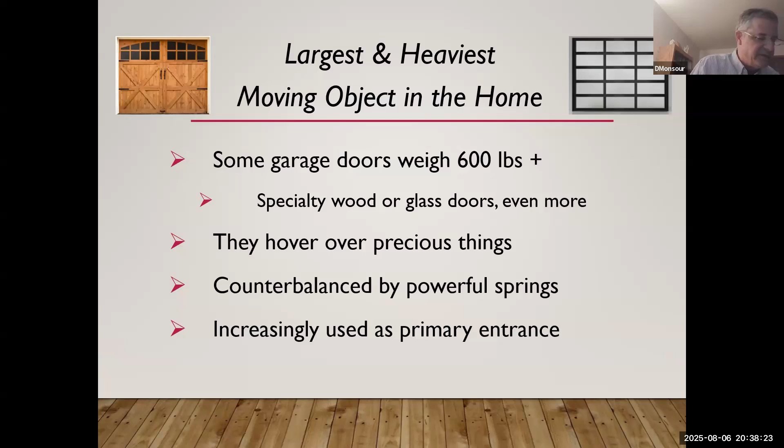So I like to tell people, imagine your refrigerator being pulled up over your head and now you're going to walk underneath it. You'd keep a pretty close eye on it. Well, that's the kind of weight we're talking about with garage doors. So DASMA does appreciate ASHI's help in getting people to take their garage doors a little less for granted and to keep them properly adjusted and maintained.

Again, these are very reliable, very safe products, but prior to 1993, the story was a little bit different. There were injuries, not infrequently, even fatalities. Clearly, improvements were needed. That picture was very clear, I think, by the late 80s, and the industry got together and made big changes in 1993 that we'll be talking about.

While garage doors are not the most expensive item you will inspect, they are one of the best investments, I think, with respect to resale. Remodeling Magazine publishes cost versus value reports every year. You're looking at the top 5 from the 2024 report. Garage doors were number 1 in percent cost recouped in resale. For 5 of the last 7 years they've been number 1, and number 2 the other 2 years. All that information is kept at JLC Online, public information.

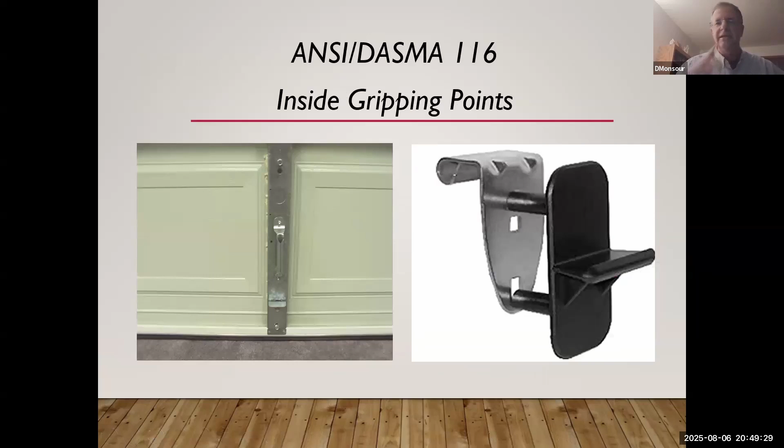Option 2 is 2 handles or gripping points inside and outside the door on the bottom and second or third section, and that's what they might look like on the inside, and that's what they might look like on the outside. Obviously, the one on the right is more of an older design. You don't see that too often these days in new construction. The one on the left is very common. In fact, I walked around 2 new developments not far from my house, and every single door on them looked exactly like that, with those handles and those fake hinges.

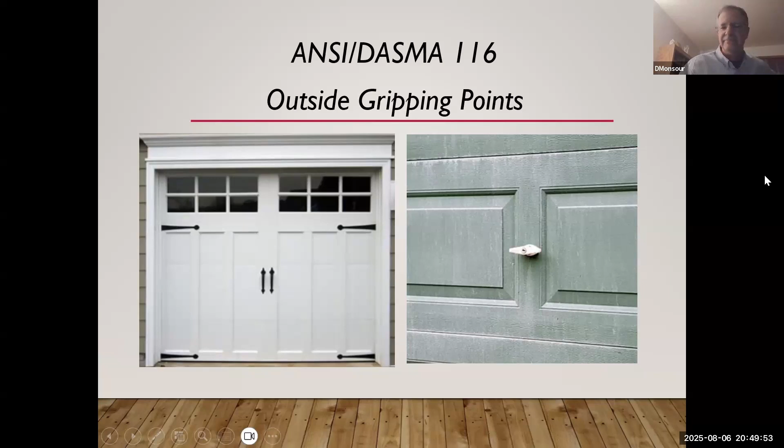Okay, so just to summarize what we've done so far, we heard of a federal law, UL 325, and 2 voluntary standards. Now, just to get in a bit to the state regulations, this is in no way comprehensive, just dipping our toe into the state regulations. States such as California, Indiana, Minnesota, and New York have regulation on repairing operators non-compliant with UL 325, and there's cities and counties and maybe other states as well.

And states such as Alabama, Arkansas, California, Connecticut, Florida, Minnesota, Montana, New Jersey, South Carolina, and Texas regulate garage doors for wind load. Plus, cities and counties do the same. One of the big ones is Denver. Many of those jurisdictions are increasingly requiring a label on the door.

The 2021 International Residential Code requires a wind load label, yes, on every single garage door, believe it or not. And that is true. Whether that happens or not is another question. How it gets enforced is a big question, but that is what the code states, and that is law in any state that has adopted the 2021 International Residential Code. Other home inspector requirements may apply for both door and operator.

Service or repair, once again, a state regulation in California, and this is in DASMA Tech Data Sheet 351. They require that 2x4 test laid flat. We'll get into that in more detail later, but that's explicitly called out in California law. Okay, so now I'm going to begin a long series of slides on Tech Data Sheet 167.

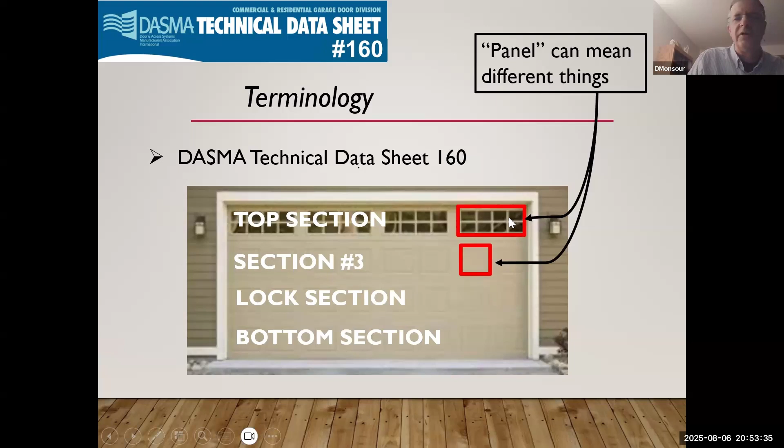Just a word on terminology. You can find industry jargon in DASMA Technical Data Sheet 160. One common misnomer is panel versus section. We call those 2-foot tall by 16-foot wide things sections. A lot of people call them panels, and sometimes we slip up and call them panels too, but most often we call panels those individual little raised panels that you see everywhere, or the group of windows.

So Technical Data Sheet 167 looks like this. Don't try to read all that. We're going to go over it in detail. I just want to show you what it looks like.

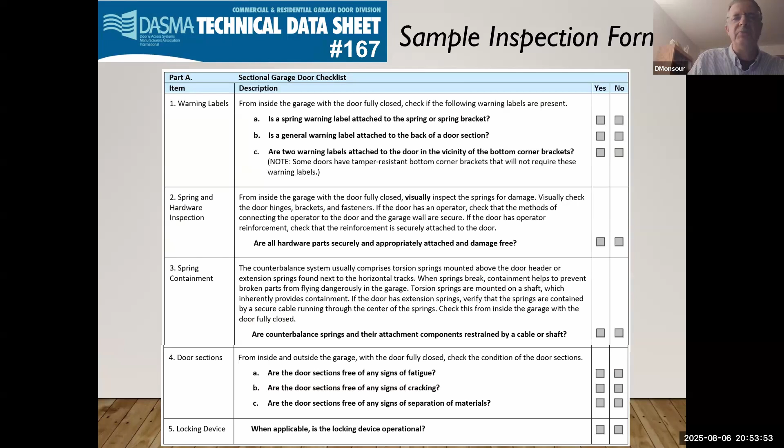Categories on the left, a lot of detail in the middle, and a yes/no checklist on the right. 1 page, 2 page, 3 page, 4 page, 3.5 pages. Tools needed: tape measure, flashlight, 2x4, remote control optional, ladder or a step stool may be needed.

The tech data sheet, the checklist, is split into 2 parts. Part A is the door, which works for a manually operated door. Part B is the electric operator. If the door is manually operated, Part A only is what you do. If it's electrically operated, you do both. It is in a simple yes/no format, and if you answer no to any of the questions or encounter a problematic situation with the door, stop the inspection, urge the homeowner to contact a trained door systems technician for inspection and repair. Hollis referred to that earlier.

Part A, the door. Start inside the garage with the door fully closed, and look first at the warning labels. There should be 4: spring label, general label, labels near the bottom corner brackets, or if you don't have labels at the bottom corner brackets, you should have tamper-resistant brackets in there.

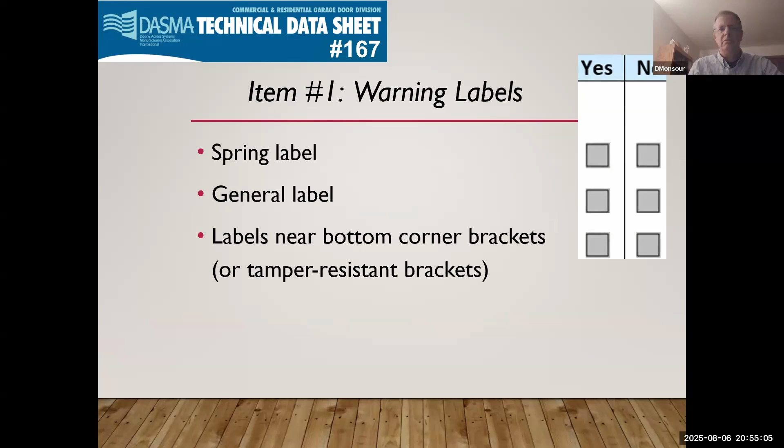Okay, item 2, springs and hardware. Are all hardware parts securely and appropriately attached and damage-free? Yes, no. That is a very big question with a very simple answer. There are, I don't know, 50, 60, 70 hardware parts, and each one of them has 4 fasteners. So you could spend all day doing that, but really you should be able to tell at a glance. And especially if it's new construction, there's no problem. But obviously, you don't do only new construction.

So take a scan. Nobody's asking you to go up with a wrench and try things or to get your head a couple inches from each item, but just stand back and look and see if you see anything loose or broken.

Springs, spring fasteners, cables are a big one. Roller brackets and hinges, operator attachment. Operator attachment is a big one. It shouldn't be a problem, but it oftentimes is because the door's not properly balanced and the operator's doing all the work and yanking things loose.

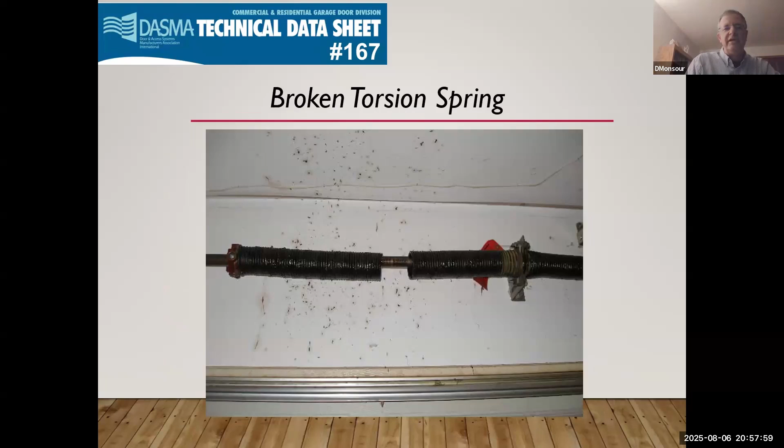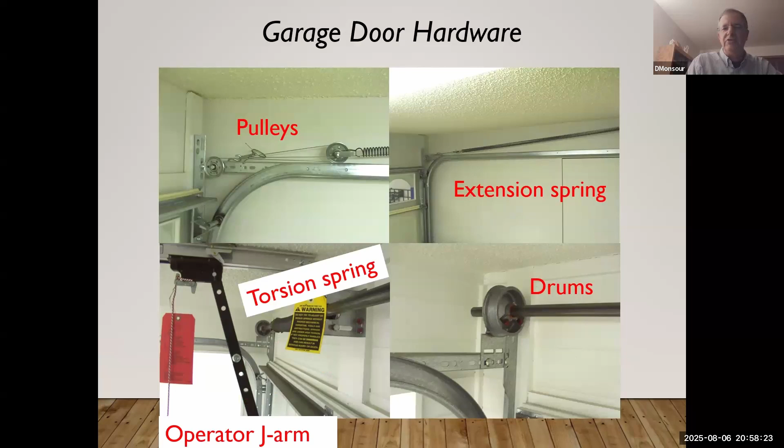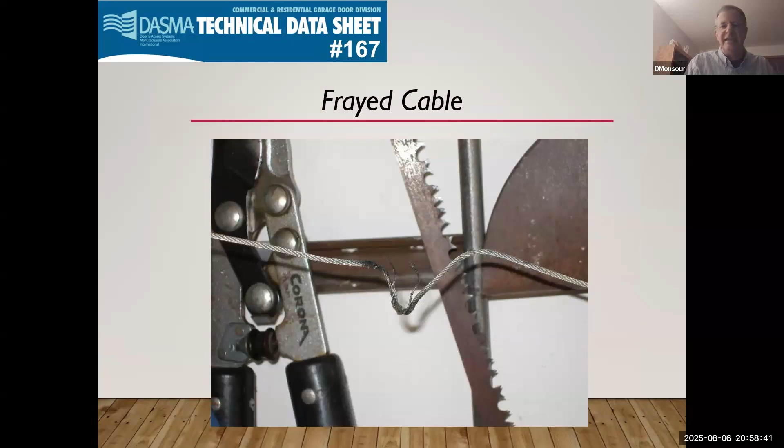Item number 3, spring containment. I show a broken spring here, but just for the sake of showing you the containment, torsion springs have inherent spring containment. That shaft is their containment. When they break, they don't go anywhere.

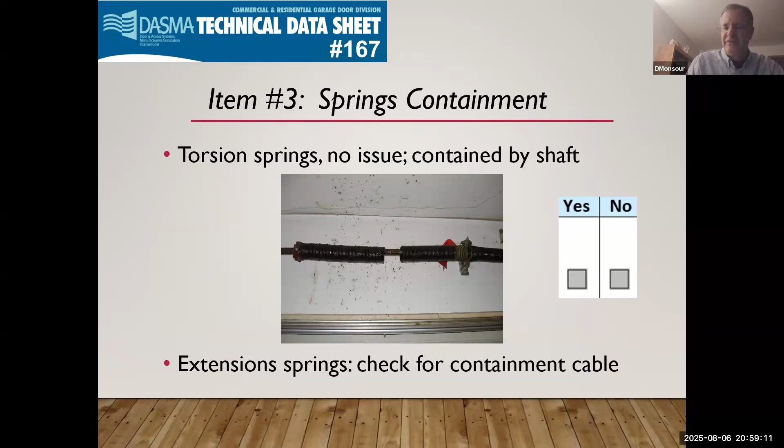Extension springs, on the other hand, may or may not have containment, and they absolutely should. Here's one that's kind of wigged out, and it does have containment. It has a cable going through it. It's not broken, but if that spring did break and that cable wasn't there, it can go flying, and it can be very dangerous when that happens. So yeah, that's an easy one to check and an important one to check on extension springs.

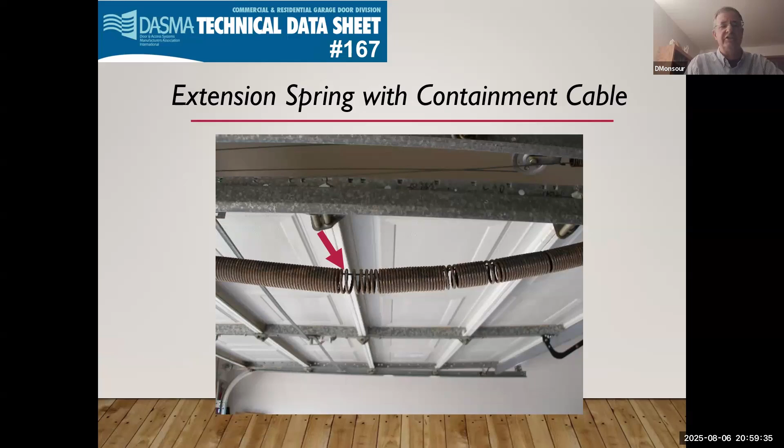So Dave, do you have any comments about the location of the torsion spring? Does that have to be centered on the door opening? No, no, that doesn't matter at all. It could be anywhere. Okay. Good, thanks.

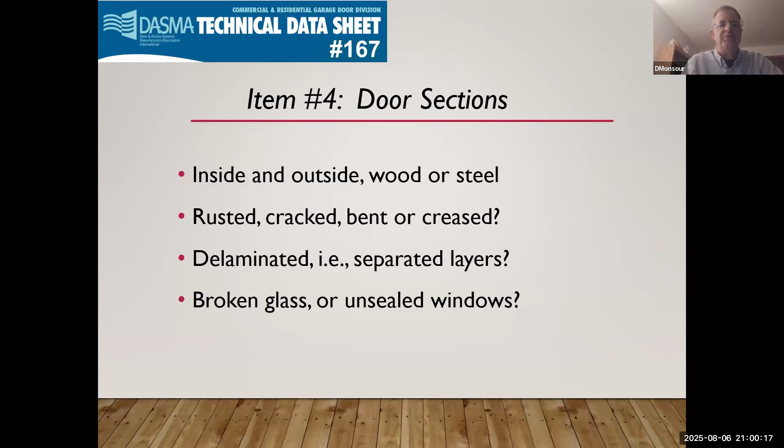Number 4, door sections. So now for the first time, you're inside and outside the garage with the door fully closed. Look at the sections, just see, is there any sign of fatigue, cracking, separation, delamination? Wood or steel doors, rusted, cracked, bent, creased, delaminated, separated layers, broken glass, unsealed windows. Very obvious stuff like that. I mean, you can see stuff like that all the time. Really should not be tolerated.

Number 5, locking device. Just check it real quick, see if it works.

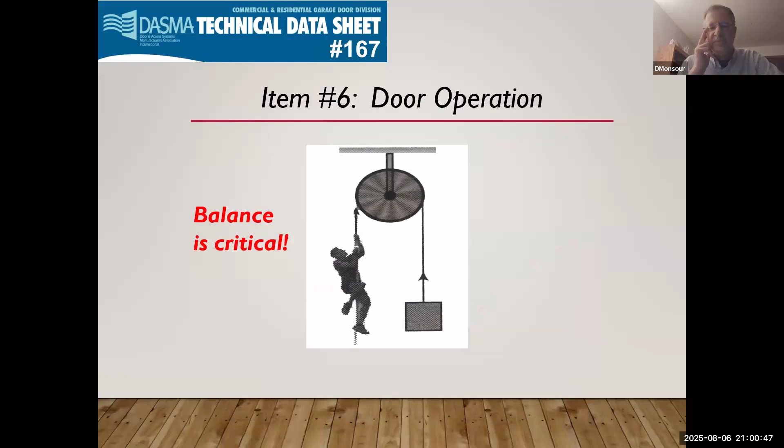Item 6, door operation. Balance is critical for garage doors. You can think of the springs and the door weight as being evenly balanced. That's the intention anyway. They should be evenly balanced, just like two weights on different sides of a pulley. If they are evenly balanced, the motor operator has a very light and easy job, and that is the way it should be.

You know, people talk about 1/3 horse, half a horse, 3/4 horse. The operator really should be doing very little work if things are properly balanced. Of course, they're not always properly balanced, so you get a lot of strain on the motor operator. Broken, obviously, usually you can't operate anything when it's broken, but quite often, especially on commercial doors, but it does happen on residential doors, the springs are not adequate, and the operator's killing itself trying to drag the door up and down.

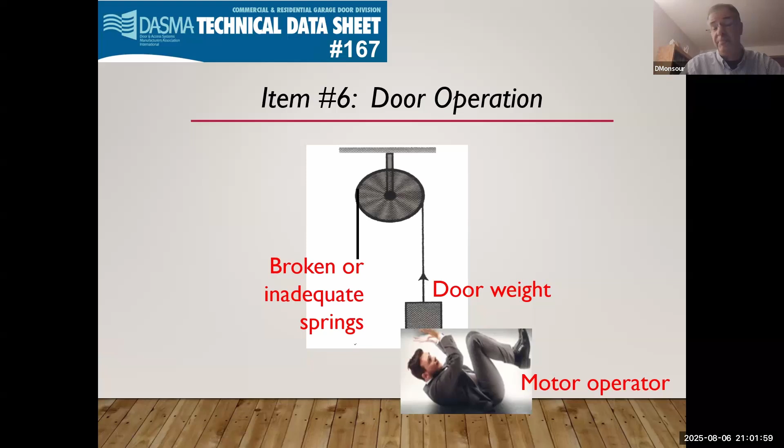The other thing I wanted to point out here is that regardless of the balance condition, every ounce of weight on that door is on that cable. So you have a cable attached to the left bottom corner and the drums at the top, and a cable attached to the right bottom corner and the drums at the top. It doesn't matter if the springs are perfectly balanced. That cable has every ounce of that weight, even so. So that cable is a very important part.

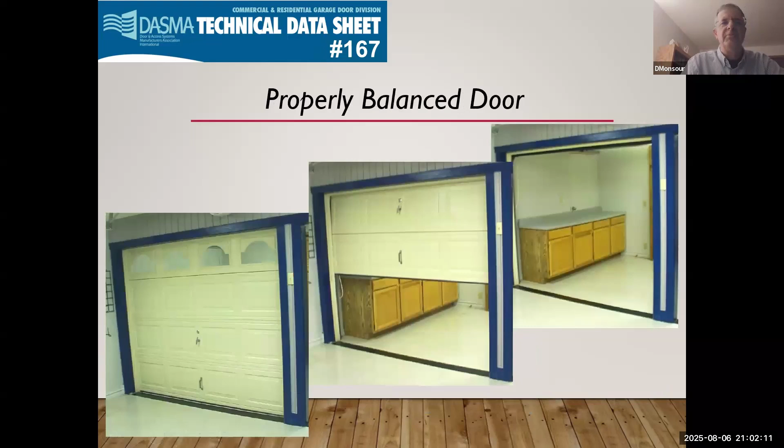Properly balanced door stops nicely at the floor, in the middle, and at the top. Some designs, however, cannot be balanced perfectly. This one has really tall sections, and probably that top section's a lot lighter than the solid wood underneath it, which is going to make the balance a little wonky. More often, because wood doors aren't the most common, you'll have heavy glazed top sections with insulated glass and light solid sections that also create wonky balance. But you'll have to use your judgment there. It's not going to be perfect, but it shouldn't be too bad either.

Next item, well, no, this is the same item, manual door operation. So we've listed 6 items to check there, but hopefully, once you get used to doing it, you should be able to blitz through these quickly. Just look and see if there's handles or gripping points, and does the door move freely. Obviously, before you do this, you have to pull that red disconnect. If the door is motor operated, which most often it is, you'll have to pull that red disconnect and try all this. So do the rollers stay in the track during operation? Does the door stay in the fully open position?

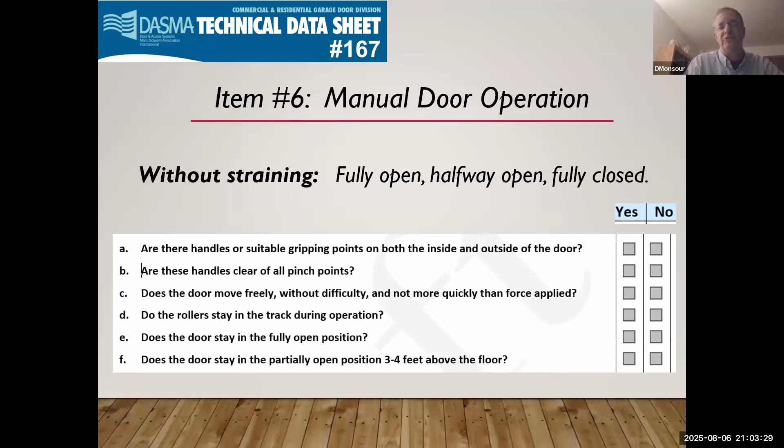And does the door stay in the partially open position 3 or 4 feet above the floor? If the door is electrically operated, this step is deferred until item 11.

Now we're on to part B, the electric operator. Start inside the garage with the door fully closed. Your first item of business is the wall label. A warning label goes by the wall control.

Wait a minute, Dave, let me back up. Did you just say that you're going to defer the manual operation till after you do the automated operation? No, it's coming up pretty quick. It's not all the way through the electric operation, just a few more steps.

Okay, so next step is the manual release handle. Make sure it's there, should be red, and should be no more than 6 feet above the floor.

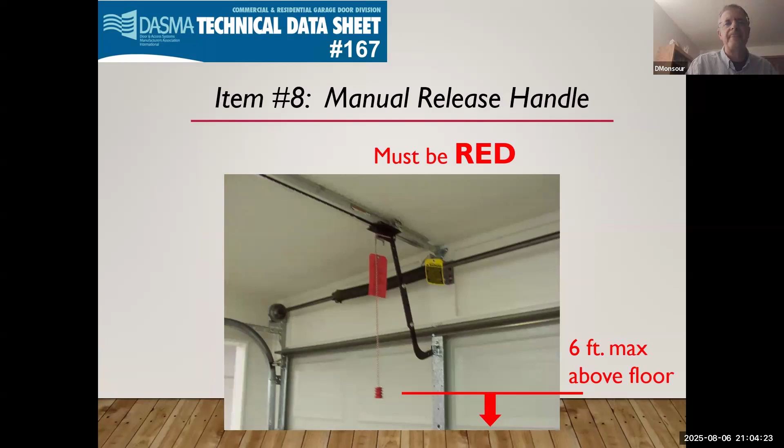Number 9, make sure you have a wall-mounted control button that's in clear view of the door and beyond reach of moving parts of the door, at least 5 feet above nearby walking surfaces to make sure kids cannot reach it, at least short kids.

And then if you have a locking device, which you often do on electrically operated doors, make sure it's disengaged.

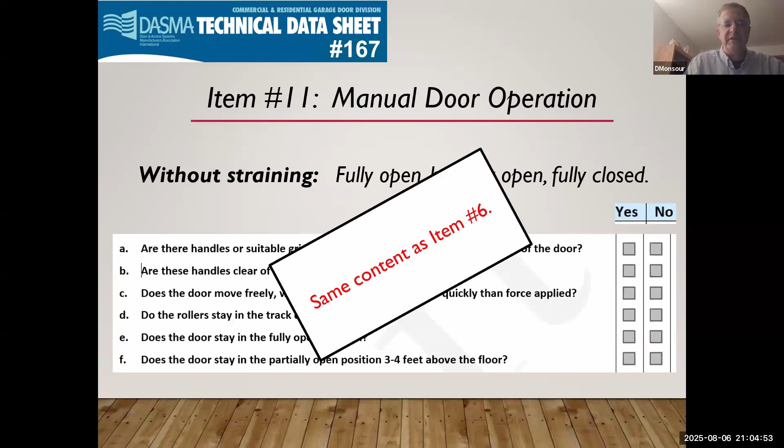And then here we go, the manual door operation we've already covered, but this is when you do that if your door is electrically operated, just after you check those few simple other things. Then you do the electric operation using the wall-mounted control button.

Does the door fully open and rest above the header? Does the door fully close and leave no gap at the floor? Is the door operation smooth and quiet? Does the trolley rail remain firm or does it sag under load?

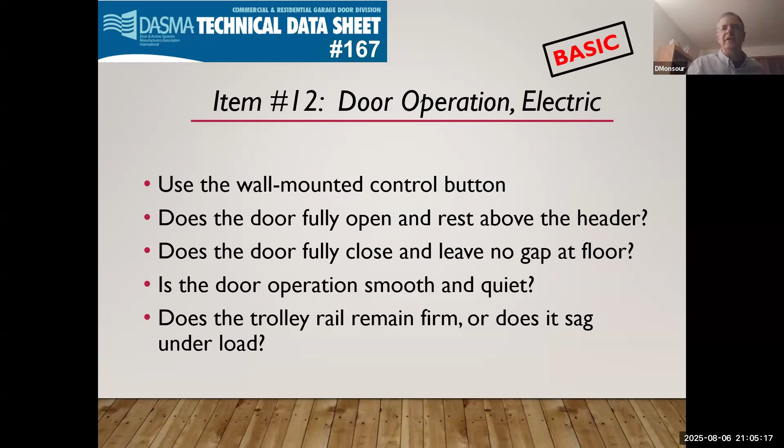That's the basic approach. If you want to offer a little more advanced inspection, you can check the remotes, check the keyless entry, check the smartphone app.

Smartphone apps have to be preceded by 5 seconds of visual and audible alarms. That's very good to know. It's unsafe for people to use their smartphone to move their garage door remotely when nobody's watching that door and it's just going up and down. You need at least 5 seconds of visual and audible alarms before that door moves.

So can the remote, since someone can operate that door remotely without putting eyes on the door, is that legal? Is that a good idea? It's only permitted if you warn whoever might be there, both visually and audibly. So it covers the blind and the deaf, they try to cover everybody. Get out of the way, the door's about to move. That's what's permitted. It's the advance of technology, and they have made provision for safety, but they don't want to completely prohibit that kind of operation as smartphones do more and more things for us.

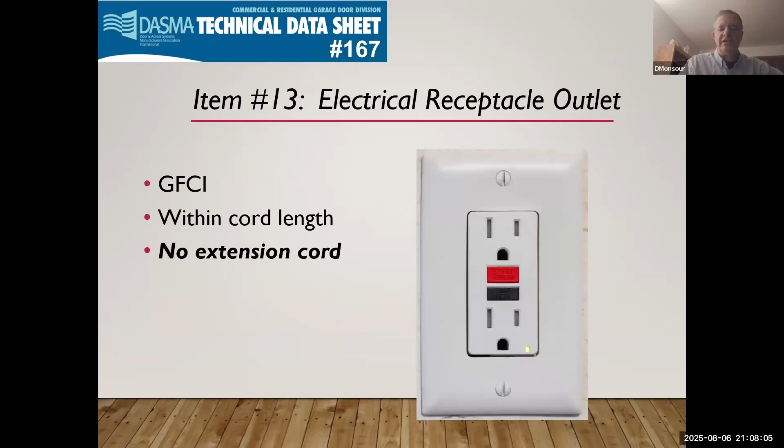Number 14, 15, and 16 are critical because they're what happened in 1993. They made a huge difference in the safety of these systems, so we place a big emphasis on 14, 15, and 16.

Federal law, item 14, is photo eyes. Federal law states that residential garage door operators manufactured after 1992 must be equipped with inherent force sensing, see item 16, and secondary protection such as photo eyes or some other safety reverse feature that meets UL 325 standards.

Okay, so photo eyes, if they're there, which they usually should be, unless you have some other provision, the beam should be no more than 6 inches above the floor. If the photo eyes are not there, verification is required from the door operator manufacturer that photo eyes are not required. So that's a simple check, tape measure, 6 inches, the beam itself, not the bottom of the unit.

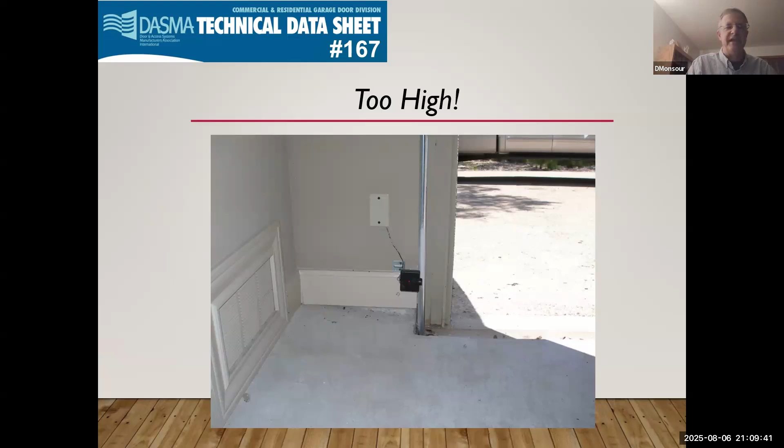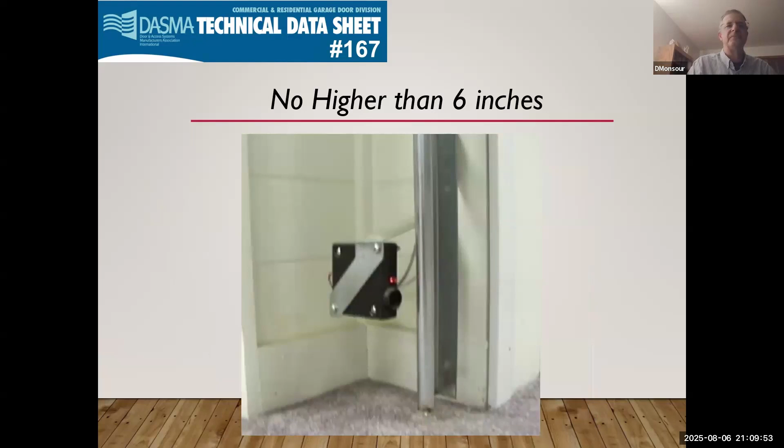Item 15, photo eye reversal test. Door fully open, stand inside the garage, safely away from the path of the door. Press a remote control or a wall mounted control button to close the door. As the door is closing, wave an object in the path of the photo eye. Does the door reverse and return to the fully open position?

Very simple. Okay, well, Dave, this is the one I've been waiting for because we got a question, or probably more like a comment, earlier when the question was posed to you, have you ever seen the electric eye fail? And you said no. And the next comment was, therefore, this test is irrelevant, right? That's one of our members' concept here, that this test really doesn't do anything if the electric eye is fail safe. I never thought of that before, but that's the comment.

Well, I guess that's the whole point, though, isn't it? You want to make sure that it does work, and not just rely on the idea that it has to work. But it's a test to make sure that it does work. Yeah, I think I'll keep doing it. But I mean, I see his point, right? Please do. Yeah, I kind of see the point.

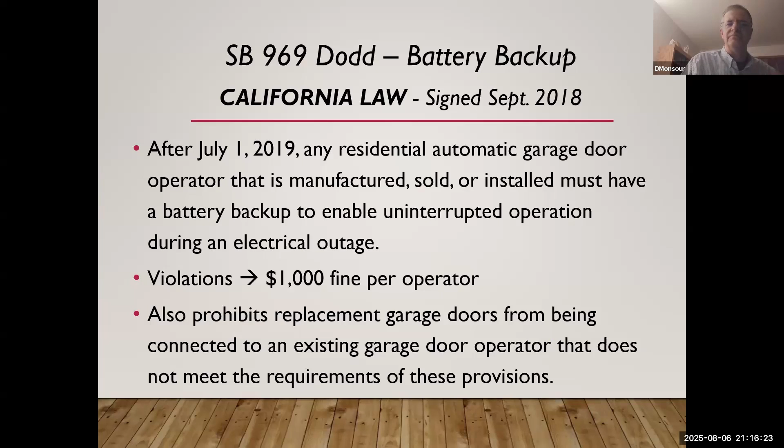The first one was in California, 2018, and bottom line here, you have to have a battery backup, which many garage door operators come with, but many others do not. But you can't use the ones that do not in California anymore. And the provisions of that California law were pushed into the International Wildland Urban Interface Code, which is adopted in scattered wildland urban interface regions around the country. So that kind of concern is moving forward, and you'll be seeing battery backup more and more.

So DASMA has done two things. One, we've published a technical data sheet on opening a motorized garage door to exit a home through the garage in a power outage, in which we focus on periodic testing, disconnecting, and maintenance. But we've also added step 17 to technical data sheet 167, the battery backup test, if applicable. So if you have a battery backup, unplug the operator from the electrical receptacle, use the wall-mount control button, and does the door open and close normally?

Okay, I knew this was coming, Dave. I knew this was coming, but it just finally did. The resistance, and you and I talked about this on the phone. The resistance that home inspectors have to doing that reversal test by putting that 2x4 on the floor, they're afraid that they're going to damage the door, and yeah, in some cases they have. Right, absolutely. I understand.

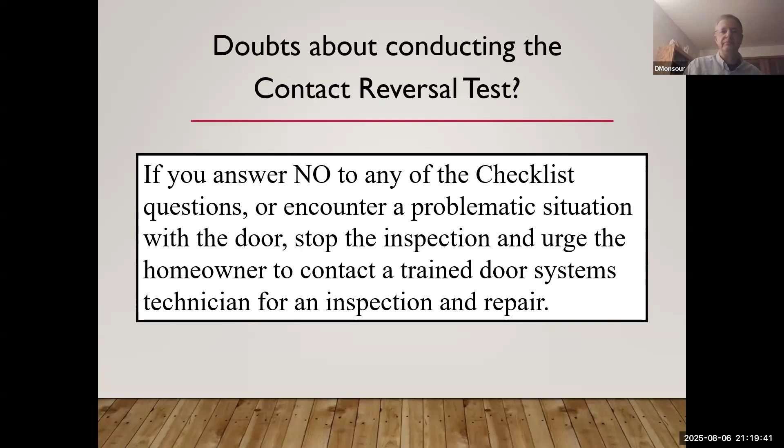So there are many opportunities for a device that we are testing to fail under test. So it's nice when the failure is easy to recover from. You could reset a breaker, or put it back on the track, or whatever it is. And not talking about just garage doors, but you could open and close a bifold door. It comes off the track. Say, well, the door's out of adjustment, but we can still put it back on the track and leave it the way we found it. So as long as something isn't physically damaged, we feel fairly comfortable doing that test.

But there are times when things break. And if it was going to break on the test, that's not us making a mistake. That's us discovering the defect. Yeah. So what I liked a second ago, maybe you could repeat that and make sure I understood it correctly. You just said something about federal law requires. Can you repeat that? Yeah. Federal law requires the operator conform to UL 325. And this is a key provision of UL 325. Every home inspector should know that. There's your defense right there, sounds to me.

I mean, I have damaged 3 garage doors in my career, all of them before I started doing the 2 by 4 test. I've tested probably 10,000 garage doors by running it down on something that's an inch and a half diameter, and I've never damaged a door doing that. But other people have, obviously. I would really like to hear those stories.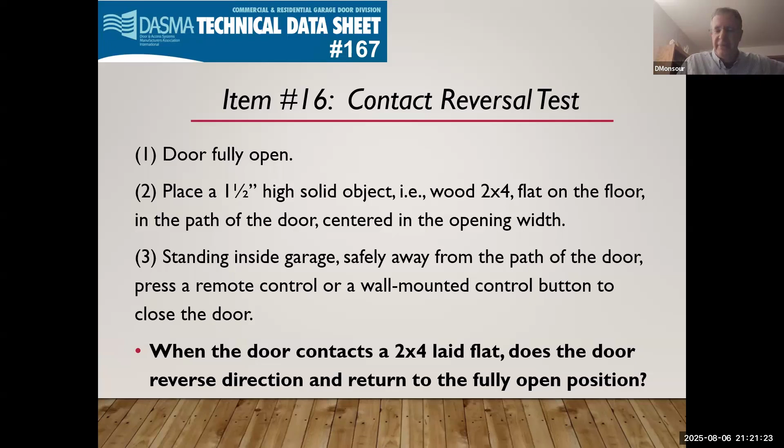It's supposed to reverse within two seconds. Let me just finish my last 2 slides and then I'm going to back up, okay? Okay. We've got 10 minutes. Okay. So I just wanted to show this slide.

Hey, Hollis, we can't see his slides. I see his face, but that's all. I don't see slides. Did something change? I see it. Did something change, JT? I'm looking at it. JT, I think the problem's at your end. You can change the view at the top. Go ahead, Dave. Keep going, Dave.

Okay. That's it. I just wanted to share doors.org. That's where you can find a good garage door dealer. Okay, I got it. Thank you. You can find a good garage door dealer. And I just want to thank everybody very much for inviting me here today and for your attention.

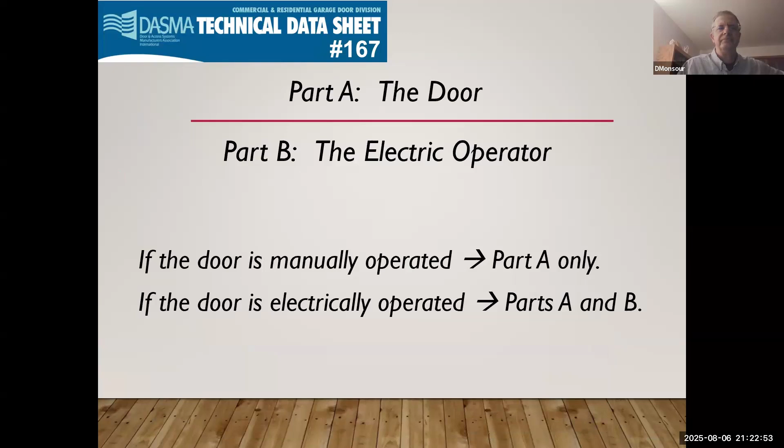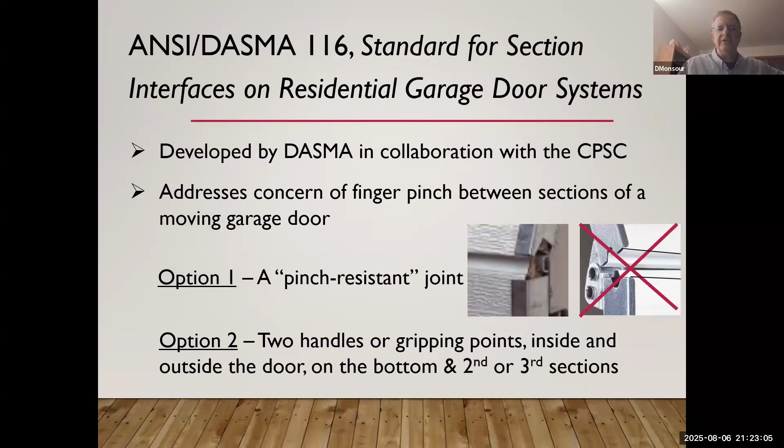Now I want to make one last comment about that test, if I can find it here. Maybe it's on the California slide. No, it's not there. Where can we get a copy of the checklist? Yeah, that's DASMA.com. DASMA.com, technical data sheets, 167.